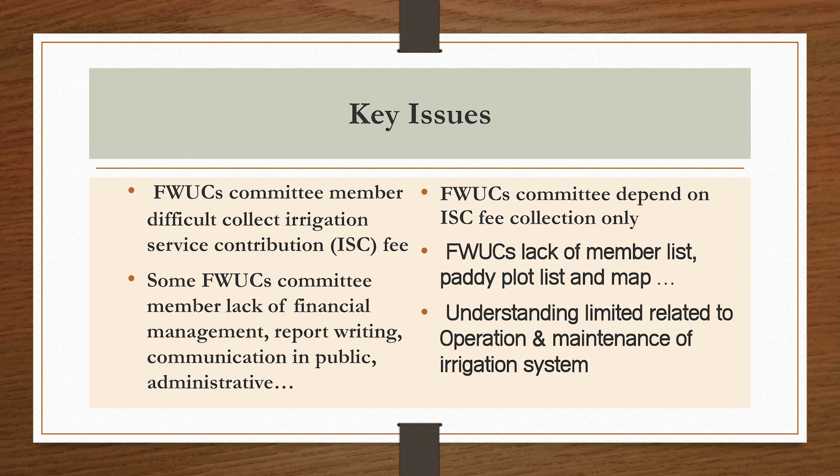Another thing is that right now the community committees depend on only one income source from their members, which is the water fee. They depend on only this one income.

If they collect the water fee from at least 70% to 80% of households, it's okay - the irrigation system or water management is okay and sustainable. But if lower than this, 30 or 40% collection from households, it becomes difficult to operate the canal or irrigation system sustainably.

So right now, to solve all these issues, my organization has developed other services and ways to gain more income, which I have already mentioned.

In summary, for the next step, we will build more capacity, facilitate and communicate with the private sector for agriculture inputs, and also make contract farming linking their products to the market. Okay, that's all, thank you.

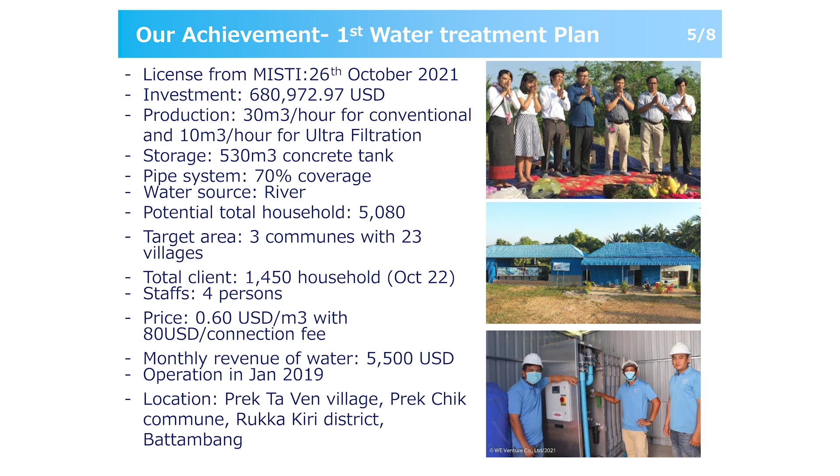This is our first water treatment plant. What I want to mention here is about the investment cost and the technology we are using. In this first water treatment plant, we use two technologies. The first one is conventional—the traditional method where we pump water from the water source, treat it with chemicals, then the water goes through a sand filter, into a storage tank, and is disinfected with chlorine. So this is the normal traditional one.

And another one we have is ultrafiltration, which is part of the membrane technology. I think even last morning they also used membrane technology. So together, that's what we provide—this is the technology that we use.

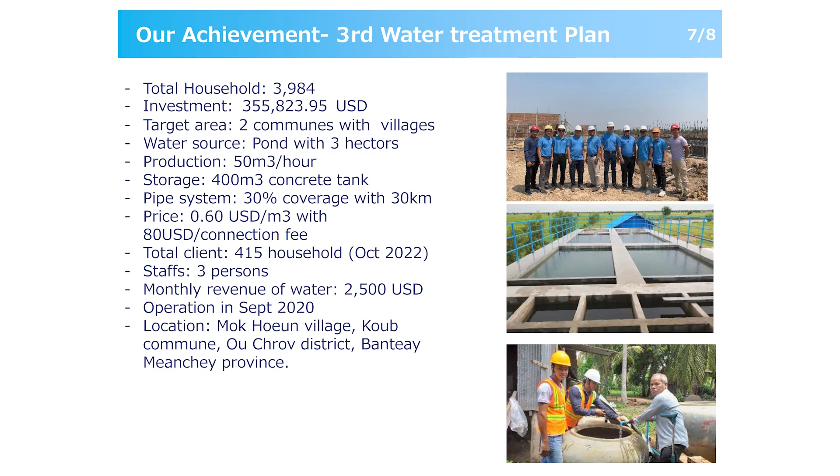The next one is similar but a bit smaller—we also use ultrafiltration. And the last one is conventional, built from concrete. So still, as I mentioned, more investment is needed on the pipe system—we still only reach around 40% of our total licensed area.

So we need to work more on this, and also look for opportunities with other investors, or work with Korean companies on spare parts, because we cannot produce most equipment in Cambodia. Most is imported from Thailand, Vietnam, and Malaysia, and Japan for generators or motors, but not so much from Korea.

So I think coming here is also an opportunity to get in touch and engage with some Korean companies. So yeah, that's all for my presentation. Thank you very much.

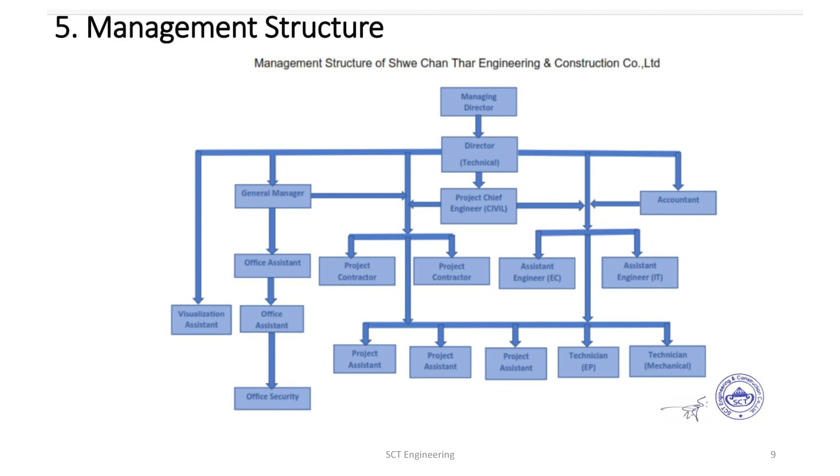So this is our management structure. In current technologies, we are applying web-based monitoring solutions and systems.

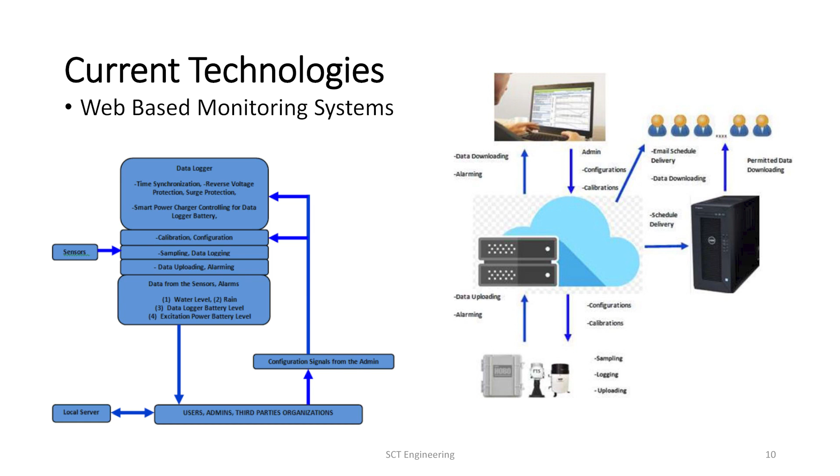Data will be monitored and collected at the sites, and then sent to the cloud server. We share the data online in real time, for mobile phones, laptops, and every internet accessible device - users can download and monitor.

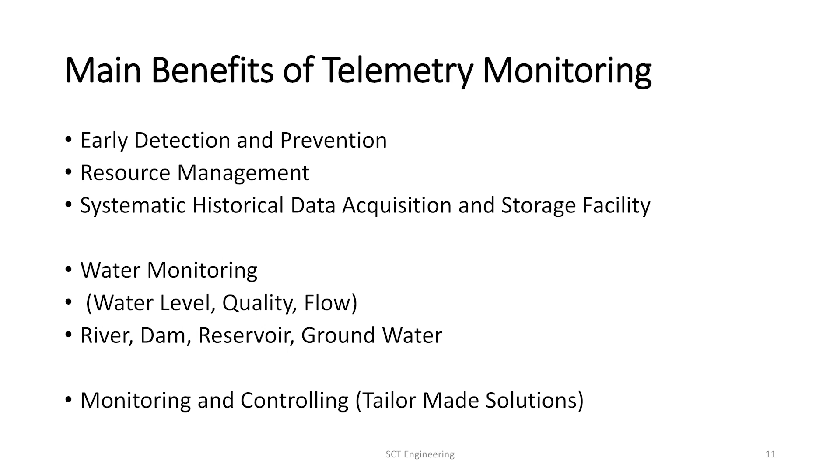So the main benefits of telemetry monitoring are early detection and prevention, resource management, and systematic historical data acquisition and storage facility, all made possible with the monitoring solutions.

For water monitoring, we monitor water level, water quality, and water flow, either in rivers, dams, reservoirs, and groundwater - not only for monitoring, but also for controlling.

This is because I'm a professional electronic engineer. I am doing all configuration and all tailor-made design by myself.

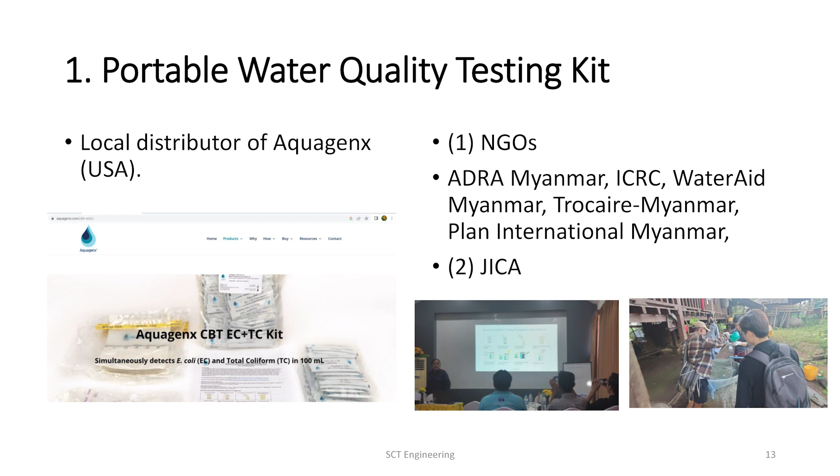We cooperate with others like JICA, GIZ, government organizations, and NGOs. Not only for assistance, but we also render services for monitoring solutions. This is our cooperation with an NGO organization for water quality monitoring, for total coliform and E. coli.

This is one part of our business - the main business of telemetry water level monitoring and early warning solutions integrated by our company, SCT Engineering. We use data loggers integrated with third-party sensors, with our principal supplier from the US.

They have their own sensors and transducers for parameters like weather parameters, water and soil moisture parameters, soil pH, soil temperature, and even leaf wetness sensors. But if our customers need more parameters to measure, we can integrate and import from third-party sensors.

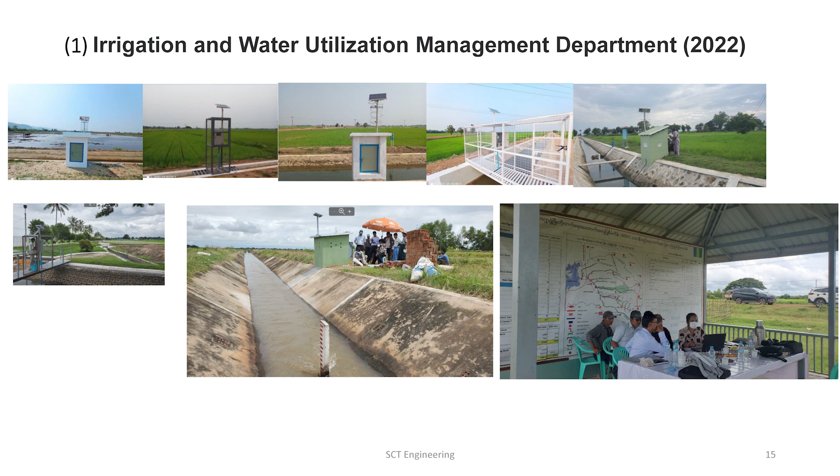So these are photos of our collaboration with the Irrigation and Water Utilization Management Department for monitoring water level of their canals. We started cooperation with them in 2021, but we actively began the installation in 2022.

At this stage, we just monitor water level only. But in the next phase, we will continue monitoring not only level but also capacity of flow. Then we will monitor and research the impact of water capacity utilization on crops, so we will be monitoring the water capacity as well as soil nature in multi-professional research.

We'll also monitor weather, climate, and temperature, and generate data and output to correlate the relationship between water utilization and effectiveness. This is under our cooperation with the Irrigation and Water Utilization Management Department's technology center.

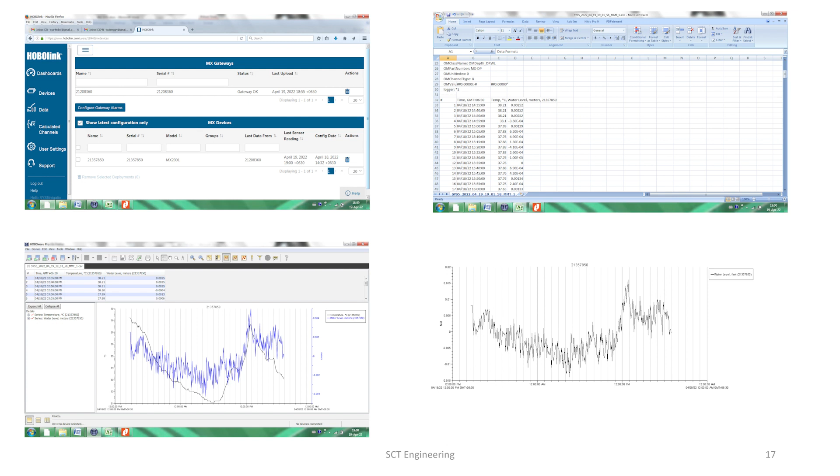So these are some views of our monitoring solutions - over there is the raw data, and this is some post-processing graph output. These are our reference photos for the projects with the Department of Meteorology and Hydrology.

These projects were installed in 2021. This was for the Mekong-Lancang project for monitoring the Mekong River early warning system. This was an international bidding, and we were invited by the Department of Meteorology and Hydrology since we did pilot projects with them since 2014 and had successful records. So they invited us to participate in this standard bidding. Finally we achieved it, and we arranged these, our own designs.

There are 10 stations altogether. 7 stations are built on bridges, but 3 stations are without bridges. So we designed for this part here with no bridge, and these for the bridge design versus the no-bridge one. Here as well, not bridge. So we have to design not only for electronic configuration but also for civil works according to the feasibility conditions of these sites.

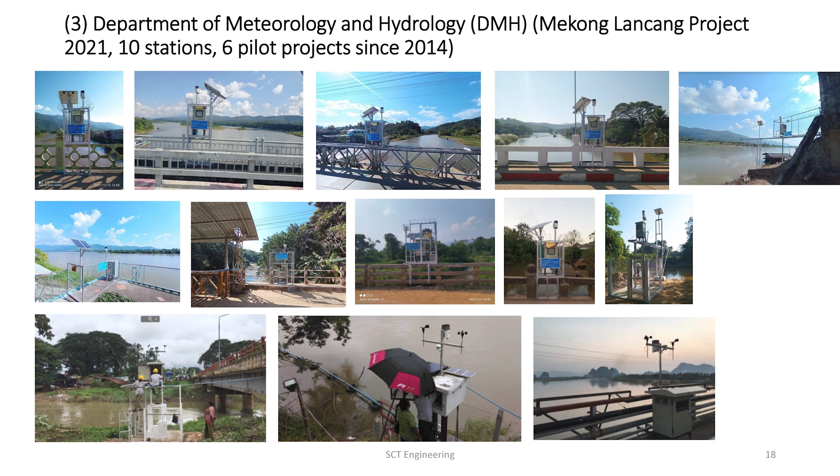Below these are the former projects since 2014, still running right now. They still only need upgrading of the data logger, because it's been almost 8 years since 2014. This is for Yangon City Development for closed channel water monitoring, and this is for water quality of construction waste products.

Key challenges I would like to highlight for telemetry monitoring: budget is very important. The government sometimes has budget, but they still need maintenance budget, and there is no maintenance budget. Also the requirement of secondary parameters for verification needs more investment. So this is one of the problems.

Also vandalism is still something we have to consider in our country. And also ambient temperature makes the expiration of the batteries too short. And also willingness to adapt advanced technology - we are seeing some resistance from the public for willingness to cooperate with advanced technology.

For future planning, yesterday's K-Water presentation was so impressive. So we are intending to cooperate with companies and organizations from Korea for visualizations of our acquired data in the near future. Thank you.

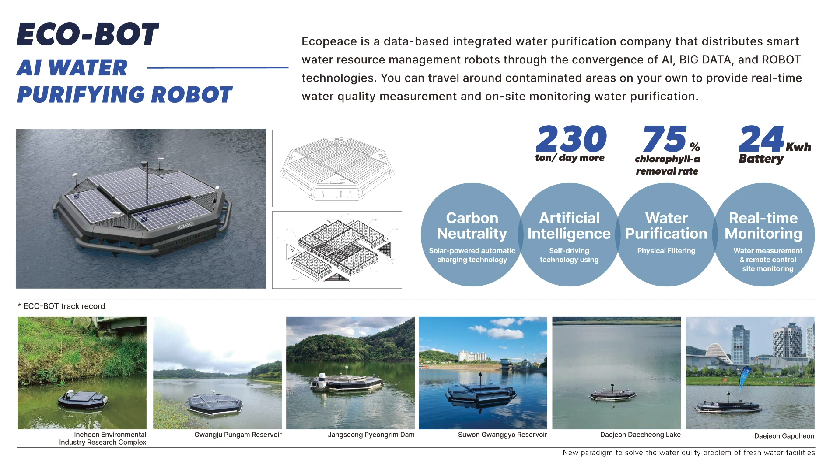EcoBot is a 100% unmanned automated water robot that provides continuous integrated water management service for freshwater facilities by converging ICT-based water quality management and 100% renewable energy utilization technologies. You can see the four keywords in the circle, and the EcoBot track record pictured here is in Korea. So EcoBot can purify the water, and also collect the water data for prediction and collection.

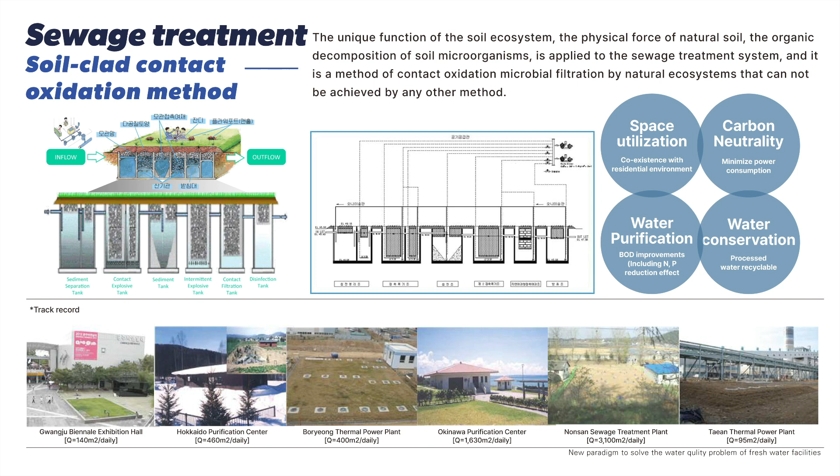That's all. If you want some information about this, just contact me. Thank you.

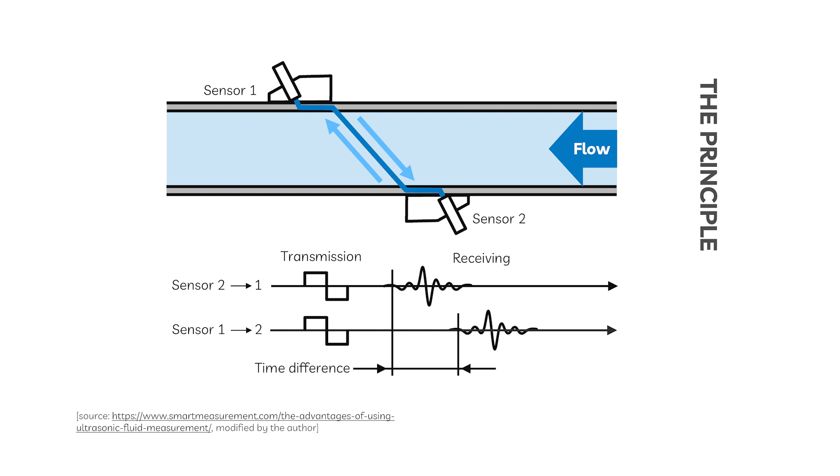It looks like very easy technology, right? But the problem is the time difference is pico to nanosecond. So we need technology to separate that pico and nanosecond difference, which is very hard. So we use digital signal processing called the cross correlation method and so on.

That's the theory. We have liquid flow meters, gas flow meters, and also a photovoltaic power supply system. We also developed defense technology using the same acoustic technology used for the flow meter. We'll talk about that later.

This is the liquid flow meter. As I told you before, we use ultrasound, a kind of sound, to measure water flow. Another technology is clamp-on. Clamp-on means, as you can see on the screen, you can just attach the sensor or transducer on the surface of the pipe to measure the water flow.

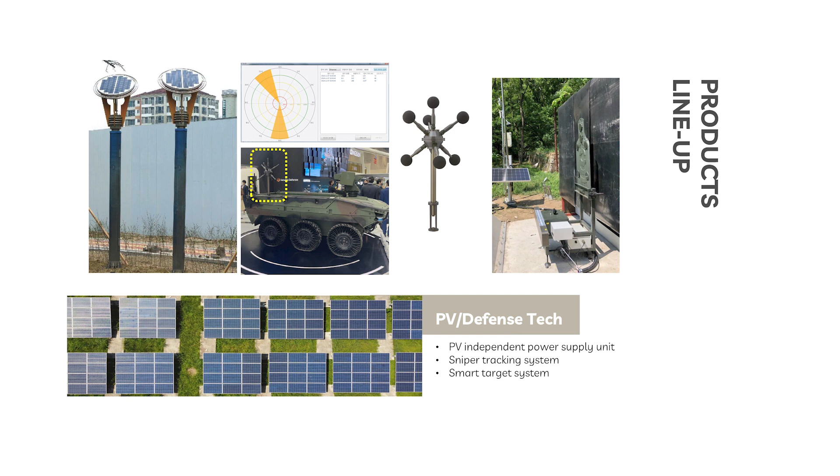We use acoustic technology to detect snipers, and also we have a smart target system. We'll talk about that later. This is the photovoltaic power supply system. As you can see, there is a rechargeable battery, so even without any sunlight, you can supply power to our flow monitoring system for a month.

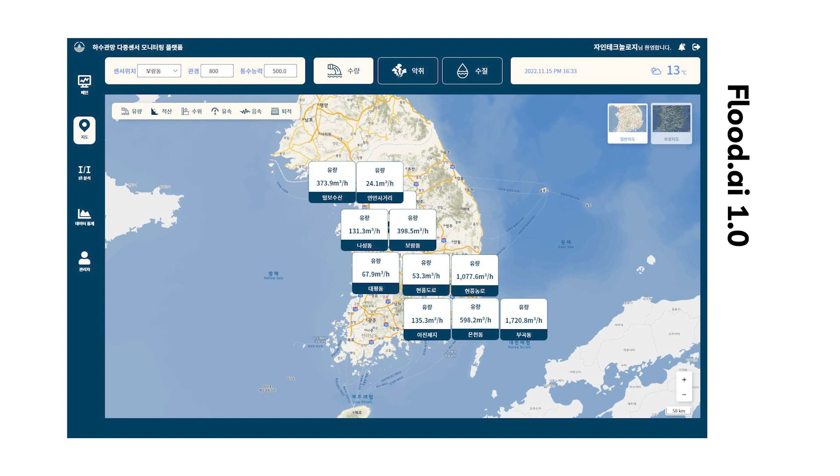And this is our data analytic platform. As you can see, there is a site with our system. If you click the site, then you can see real-time monitoring data anywhere, anytime, if you have internet access. We are trying to use the Amazon cloud server, so in the near future you can check the monitoring data anywhere in the world.

We also use data to produce useful information and value for customers. Now, defense technology: I told you we use sound to measure the velocity of flow, which is moving. If the opposite side of that technology is applied, if we hear sound, then we can locate the source of that sound, right?

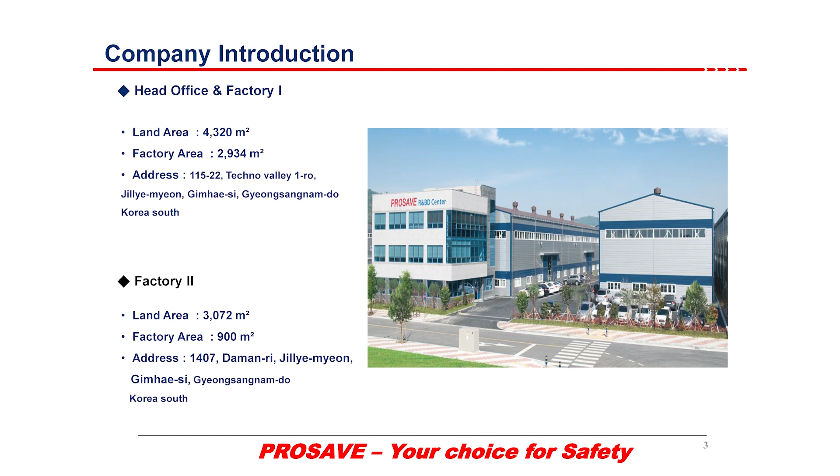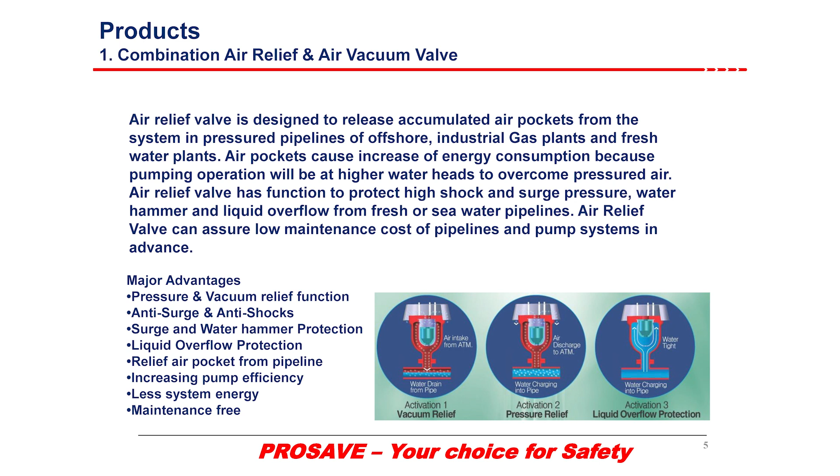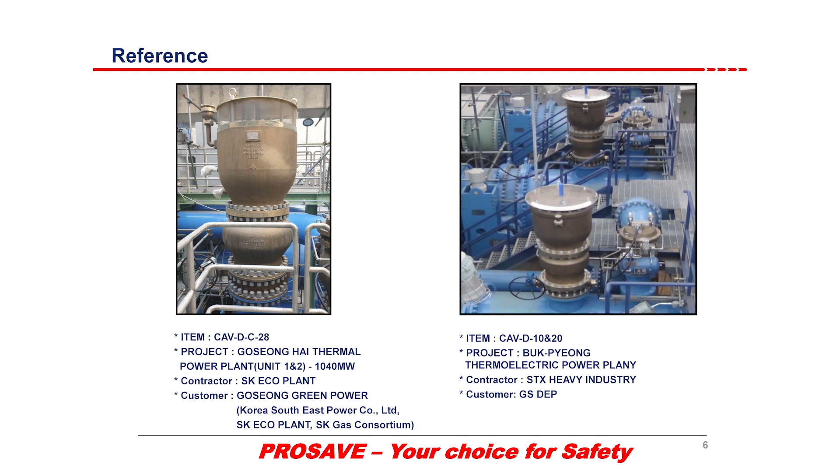Our first product is the air relief and air vacuum valve. It is designed according to AWWA standard, which means American Water Works Association International Standard. This valve releases the air accumulated in the pipeline system, reducing pump efficiency loss and saving cost. This product is installed at the water cooling system of power plants, in sizes of 28-inch and 20-inch, for desalination plants and offshore plants also.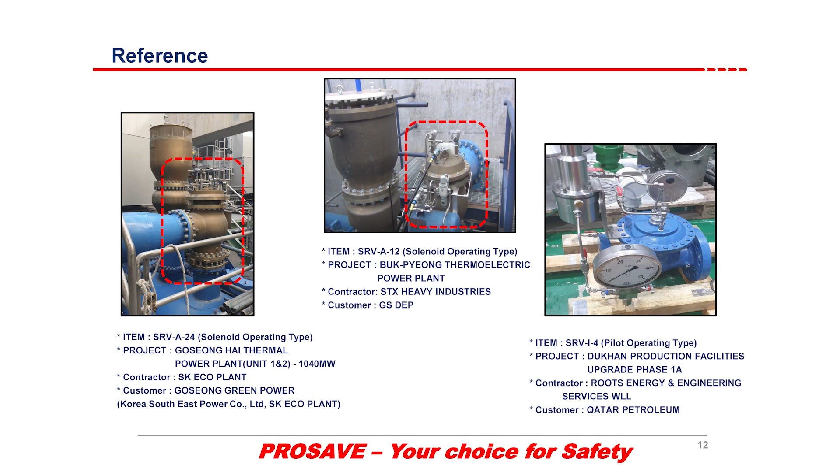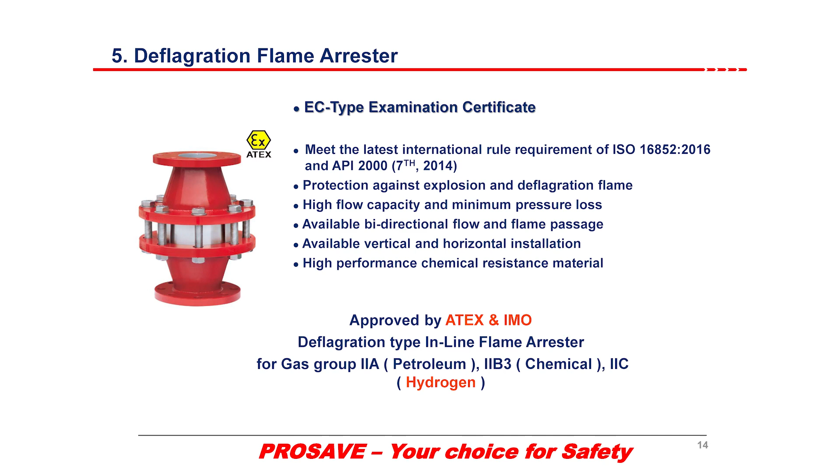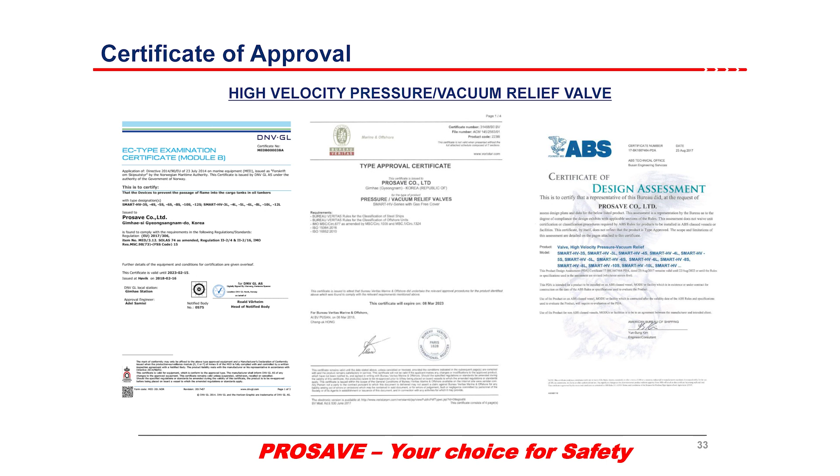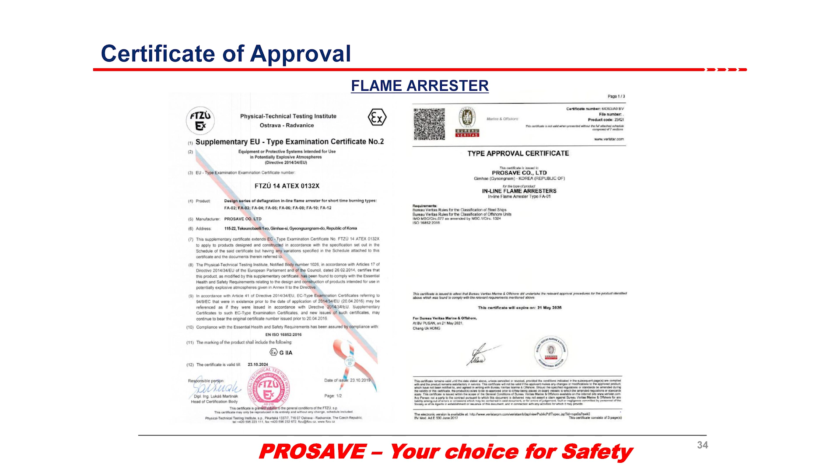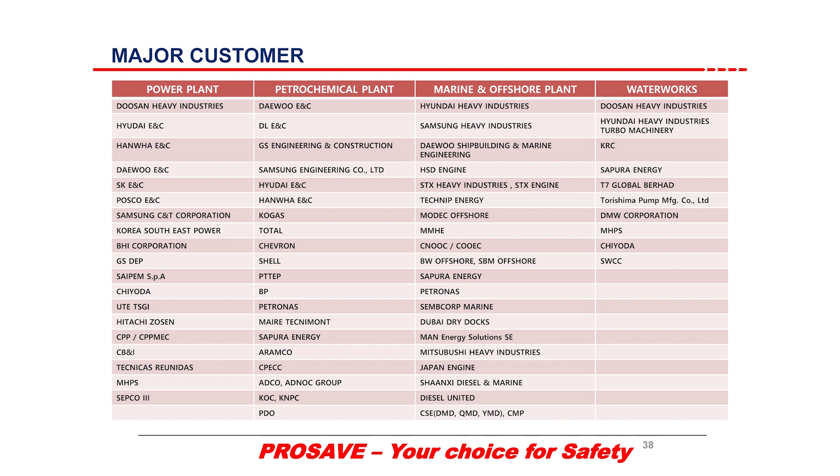The next content is the certificate status for our products. We have a high quality management system with ISO certificates and various certificates for various industries, such as ATEX, UL, CASE, etc. Last is our major customer list. In case of waterworks application, Doosan, Hyundai Turbo and Machinery, K-Water, and KRC are our main clients in Korea, and Sapura Energy, T7 Global, Torishima Pump, Mitsubishi Hitachi Power Systems, Chiyoda, SWCC are our main global clients.

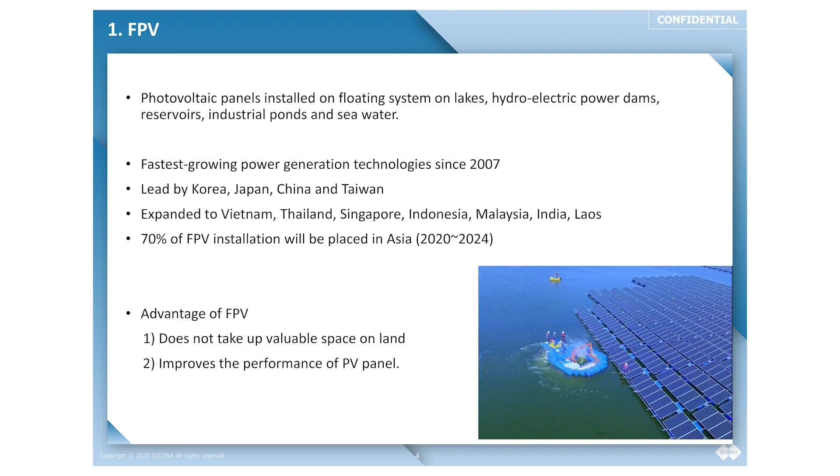There are 5 chapters, and let me start by introducing you to what FPV is, and after that, about our company. Firstly, FPV stands for floating PV, or in other words, floating solar panel power generation. It's a floating system installed on water bodies such as lakes, dams, reservoirs, industrial ponds, or sometimes in seawater. It's the fastest growing technology since 2007, and the major countries are mostly Asian countries like Korea, Japan, China, Taiwan. At the moment it is expanding to the Southeast Asian market, including the Mekong countries. The market expects that around 70% of floating PV installations will be placed in Asian countries.

I can say the advantage of floating PV is two things. One is that since it uses an unused water body, the country can use its territory more efficiently. The second is that it has better efficiency than ground-mounted solar panels, because solar panels have a suitable temperature for power generation, which is around 27 degrees. Hot weather is not always good for power generating, so if you install it on water, it gives you a cooling effect. So that is another advantage.

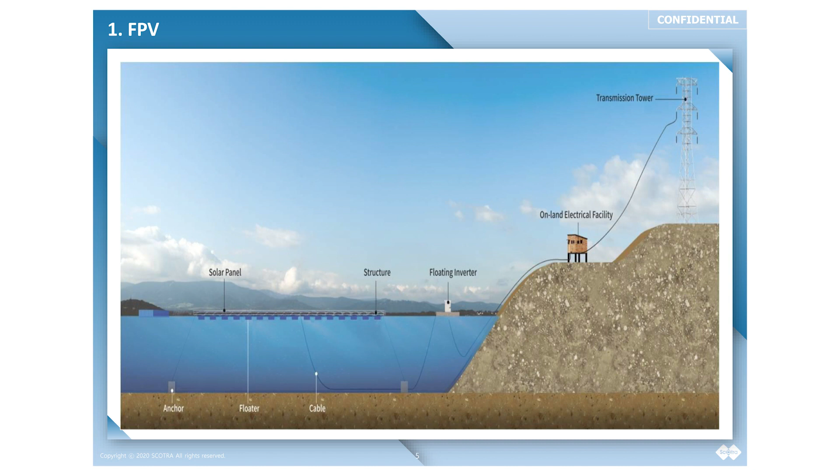Basic concept of how floating PV works. There is a floating PV platform on the water, as well as the anchoring and mooring on the bottom. It goes to the floating inverter, which transfers the DC power to AC power, and then it goes to the electrical facility and then the transmission line.

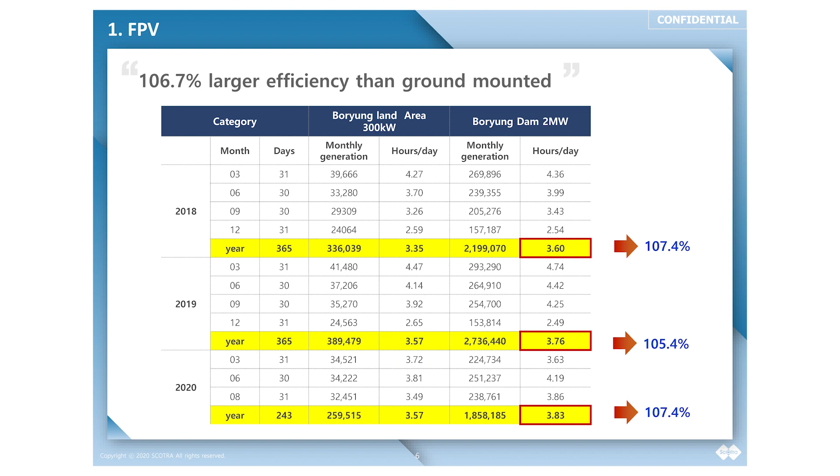This is the comparison table between ground-mounted and floating solar. We have studied for 3 consecutive years that floating solar has a better efficiency than ground-mounted, about 5 to 7%. This is not just our study, you can easily find it on Google.

Next, it's about our company, SCOTRA. We were established in 2007, and we have 92 employees. We are a company based in Korea, with one headquarters, sales office, and R&D office in Korea.

During our 17 years of history, we have achieved many kinds of patents and design registrations. The most strength of our company is that we have more than 1,800 references for anchoring and mooring, which makes us the strongest company in this field. We do know about water, we know how to control the water.

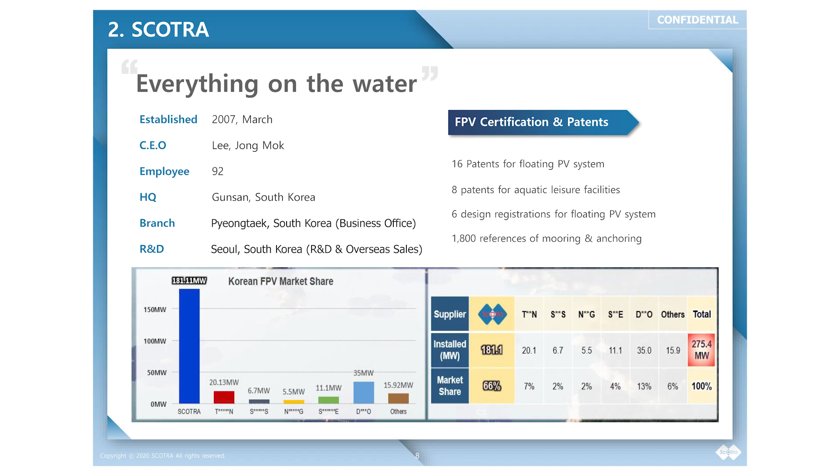The below chart shows our market share in Korea. You can see the right part, the red section. In Korea, there are totally 275 megawatts of floating solar installed. Our company, SCOTRA, has installed 181 megawatts out of 275, so we are taking around 66% market share in Korea. I can say that we are a leading company in the Korean renewable energy industry.

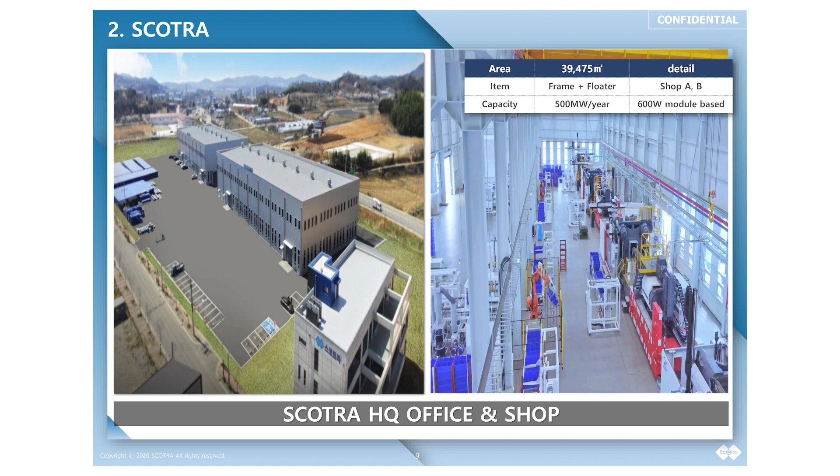This is our company layout, outside and inside. This factory is around 40,000 square meters in size, and here we manufacture around 500 megawatts per year based on using 600 watt solar modules.

Inside the factory, we have 4 injection molding machines, each with 3,000 tons capacity. It's a quite new facility, so our processes are mostly automated, so it doesn't need much labor.

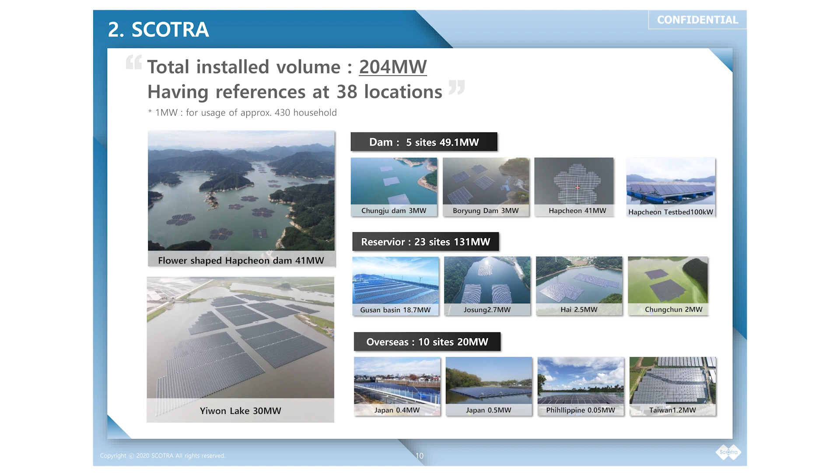Totally, we have installed 204 megawatts domestically and globally. Our project references can be divided into 3 parts: dam, reservoir, and overseas. We have done so many projects, so I cannot show you all, but I've picked some references to show you. This is one of our major project references.

This is Hapcheon Dam, a 41 megawatt flower-shaped floating PV. We cooperated with K-Water. As you can see, the floating platform is made in the shape of an apricot flower, the symbol flower of Hapcheon province. So we are capable of designing considering the client's desire. It's a very remarkable project because it not only gives power generation, but also gives a good scenic point to the public. It's a very good example for the renewable energy industry.

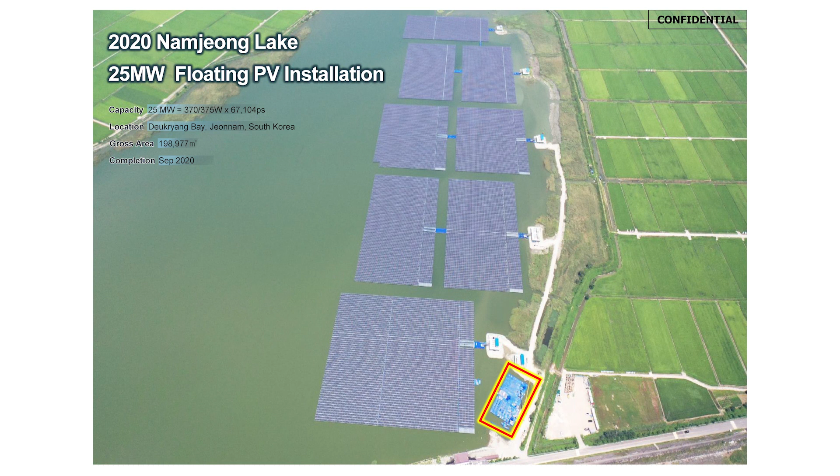Next is an industrial pond project in Korea, which we completed in 2018, located in Gunsan retarding basin. This is a reservoir project located in the southern part of Korea, a 25 megawatt floating PV we installed in 2020. And our most recent project, completed in May this year...

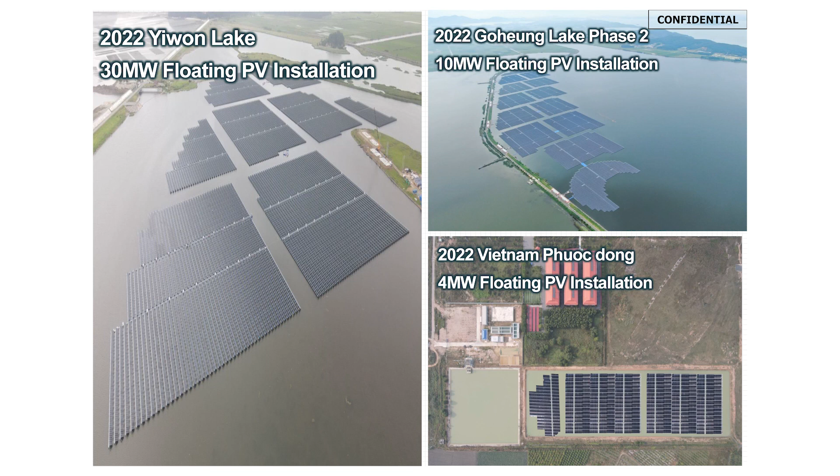Another recent project in Korean lakes is 30 megawatts and 10 megawatts. Also, at the right bottom, that is a Vietnam project, under construction, and we are targeting to complete it by the first quarter of next year. This is our first project in Mekong countries, so based on this, we would like to expand our market to global and Mekong countries as well.

Our product is simply divided into 3 parts: the floater, structure, and mooring parts. For the floaters, we have 6 compartments inside, so even if there is any damage or leakage on one side, the other 5 remaining parts will keep the buoyancy. Of course, we also have another type of floater which doesn't have a compartment.

The no-compartment type can be used for locations where there is no typhoon, no strong wind, no heavy rain. So based on the condition, we choose the suitable type of floater. And for the structure, we are using anti-corrosive material.

And it is coated with zinc, magnesium, aluminum, which shows very great performance against salted water.

And for the mooring parts, that part name is elastic spring device. It's our own patent technology. We are installing it in the middle of the mooring lines to minimize the mooring lines and to hold the floating PV platform more stably.

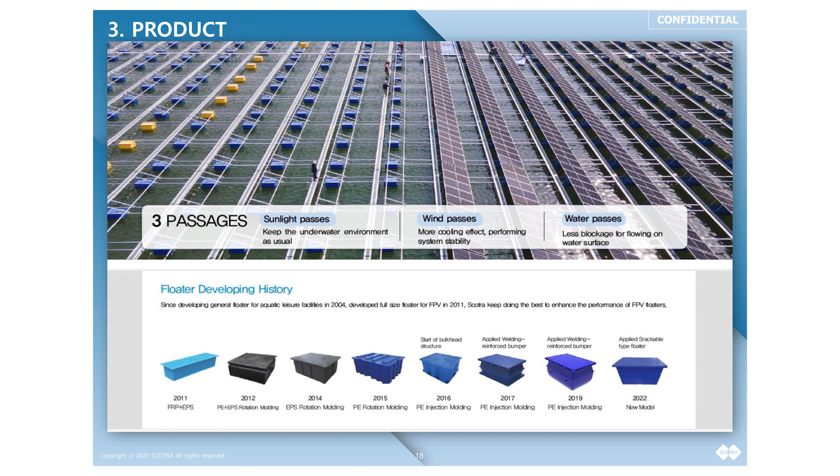Here you can see the picture at the background. Our system has lots of open spaces, which I call three passages, our most important advantage. It allows sunlight, wind, and water to pass through, so I would like to say our system is very eco-friendly. And we keep researching and developing our floater year by year to enhance our quality and competitiveness in prices.

This is the composition of our floating PV unit. It consists of a floater, frame, solar module, and at the bottom, UCS connection. It stands for unit connection spring.

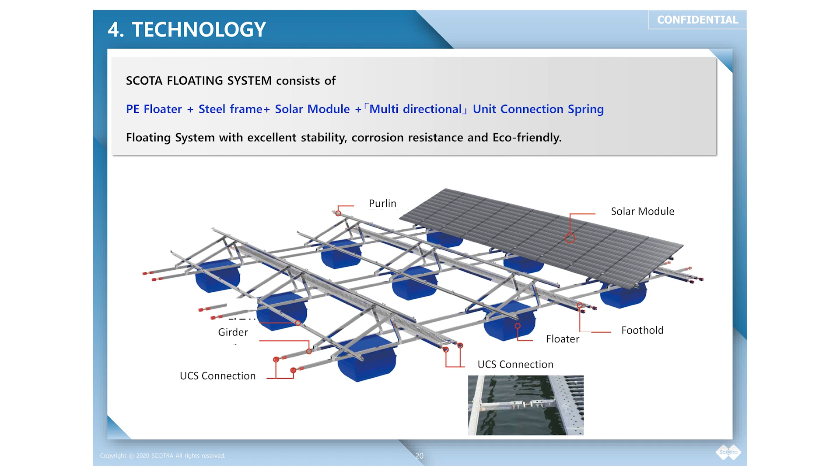This part is very important because in Korea, and maybe in your country too, we have two types of seasons: flooding and dry season. Everyone can make something float on water, but it's also important to have stability when the floating structure hits the ground in dry season, and mostly the bottom of the water body is uneven. With this UCS connection technology, the spring connection can accommodate angle changes up to 27 degrees, so our system can be placed on uneven land while keeping stability and durability. This is one of our technologies.

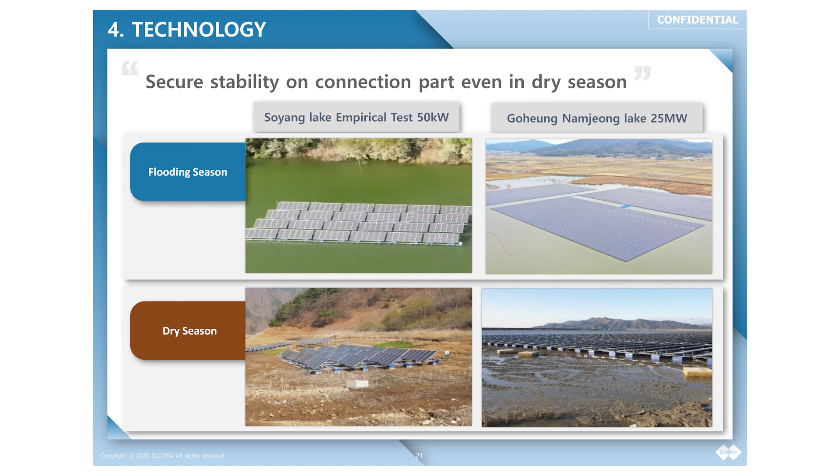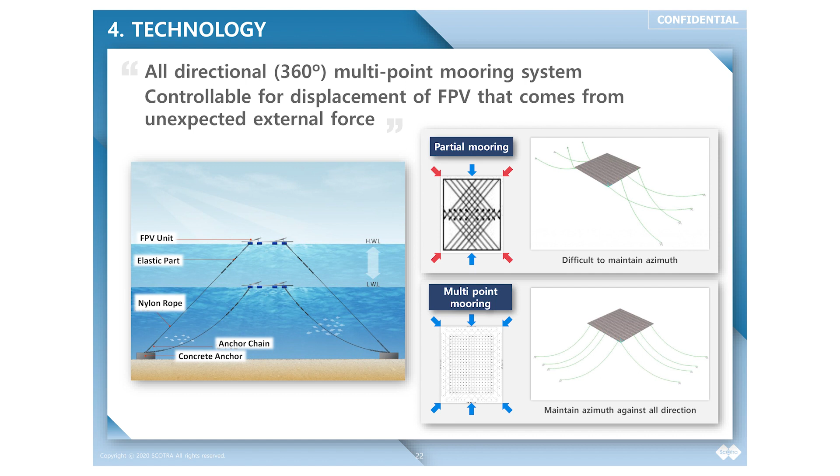This is for the mooring part. We use multi-point mooring, and for the mooring part we use the patent elastic spring technology and nylon rope. The key point of mooring is to minimize the movement of the floating PV platform to within 2 to 3 meters, and we are capable of doing that. This is our patent technology, how the elastic spring works.

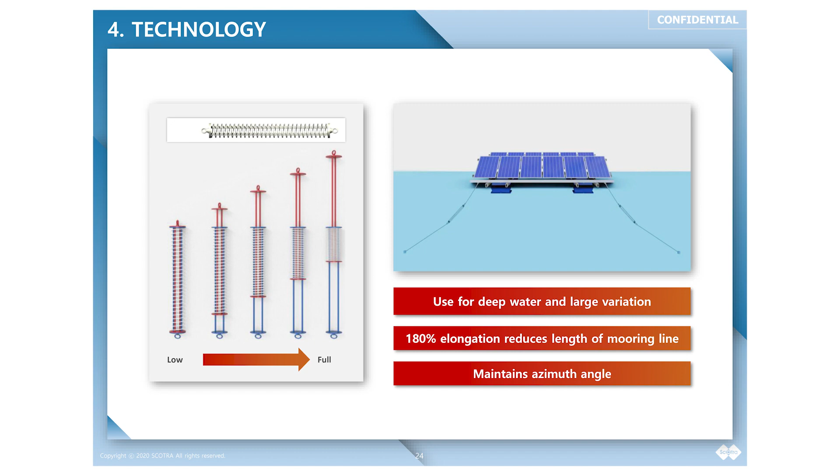When the water level goes up, the elastic spring expands, and when the water level goes down, the elastic spring shortens. This kind of technology is usually used for water depths more than 20 meters. This elastic spring has 180% elongation, and it maintains the azimuth angle as well.

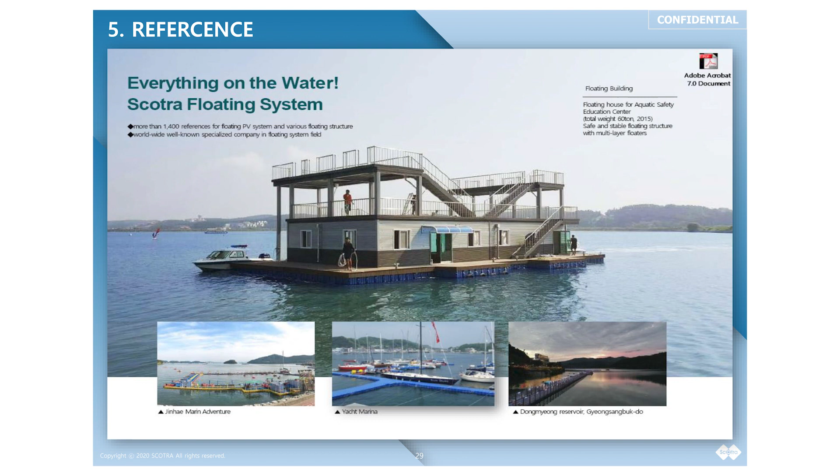Lastly, other than floating PV units, I want to show you that we also do other floating businesses, like floating buildings, floating leisure facilities, floating marinas, floating bridges, floating electrical facilities related to floating PV, floating construction barges, floating boats, and floating fish farms. For example, for the construction barge, the weight of the excavator is about 40 tons, so we can design this kind of floating barge too.

Before the end of my presentation, I would like to show you two videos that may be interesting to you.

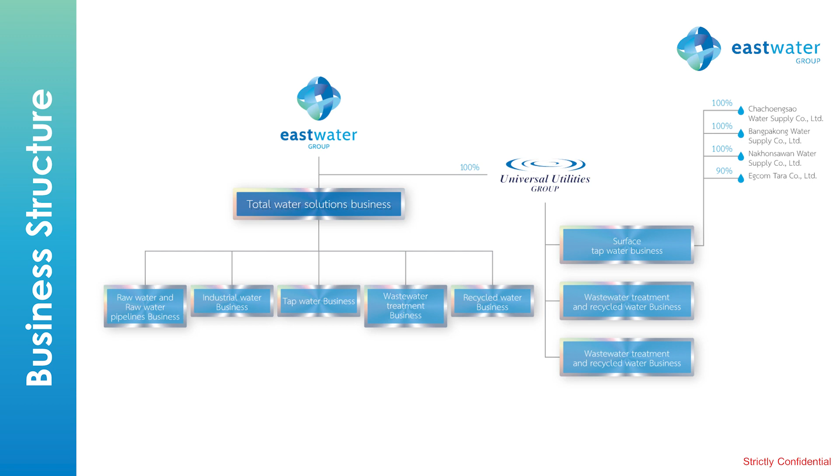Next, please. Our structure is basically: we have the main business, East Water, and our subsidiary, UU, which operates all of the concessions and all of the tap water and wastewater treatment. East Water itself basically provides industrial water, mainly to industrial estates and factories, and also for consumption for the Waterworks Authority. Next, please. So this is basically our entire total water system. We start mainly with water from reservoirs, and then we pump that.

The next is we provide water to either industrial estates or factories. That could be raw water if they have their own treatment plants, or if they don't, we treat water into industrial water up to whatever specifications is required. We also provide both raw water and treated water for tap water, depending on the contract.

Once all that water is used, the wastewater is basically treated, so we also provide that service. If required, we also provide recycling. And as I said, we also have a small side business of drinking water.

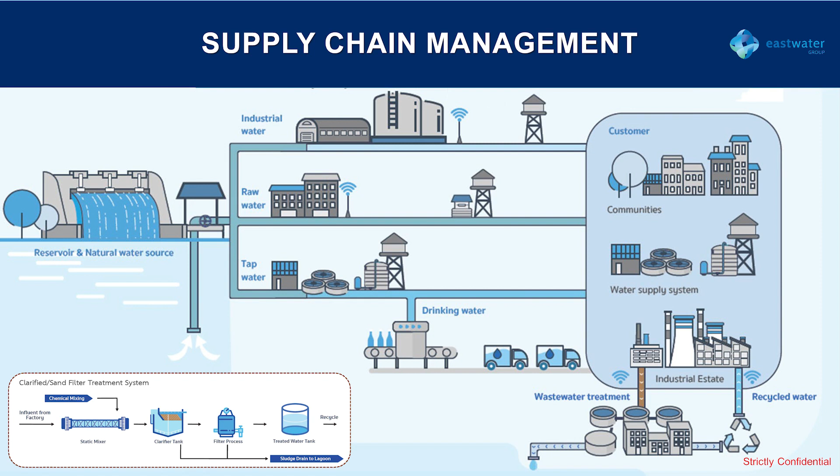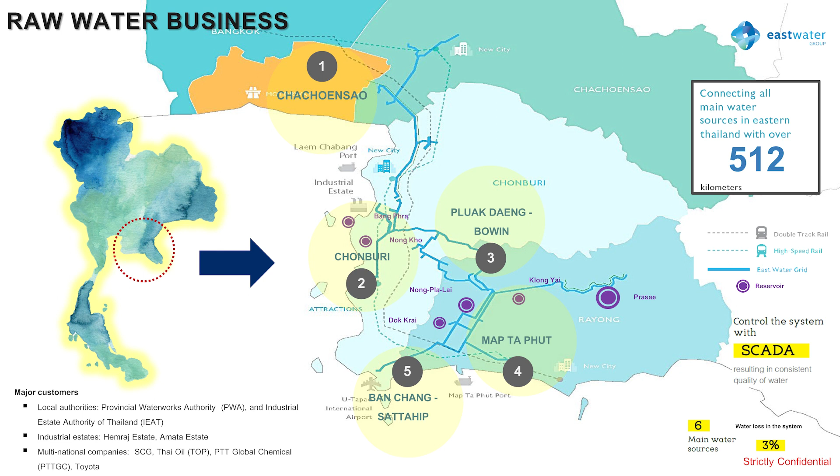Currently, our main operating area is in the eastern seaboard of Thailand, which coincidentally is the same area as the EEC, which we're hoping to develop within the next 10 years or so. We are currently operating basically 512 kilometers of main water supply pipelines. This doesn't include all the small distribution pipelines and tap water pipelines that go into some houses.

The tap water business, we basically have roughly 12 concessions currently. Some are held by Eastwater, some are held by our subsidiary UU, but all of them are operated by UU. The total production is roughly 350,000 cubic meters per day just for tap water, and another roughly 500,000 or so for industrial water.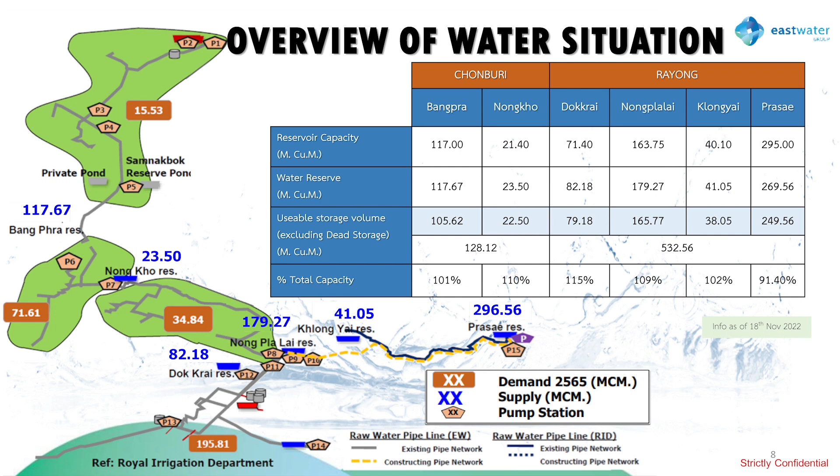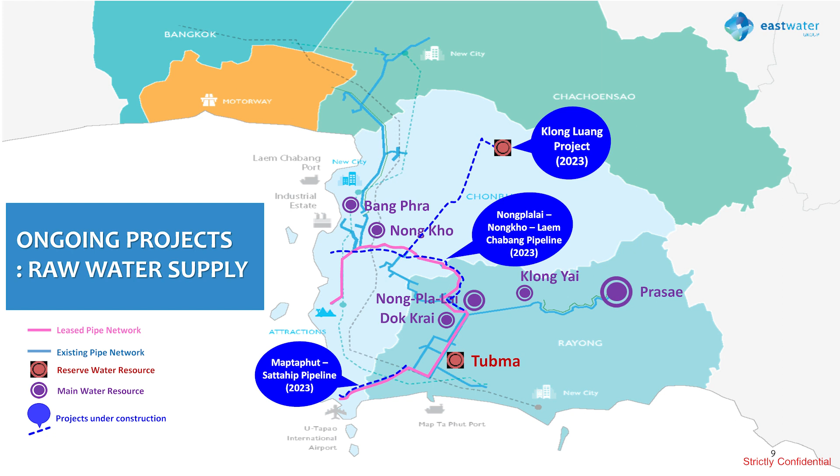This is just to show our current water supply projects. The top one is the Klong Luang, a water supply system from Klong Luang Reservoir to supply EEC. We also have new parallel pipelines. The second one, the Nongplalai, Nongkho, Laem Chabang, parallels our existing pipeline because we are currently at maximum capacity already, so we need to expand. Same as the Maptaphut Sattahip. So we are expanding to support the growing demands of the EEC.

As I said, we provide total water solutions. Basically, three types of contracts: BOT, BOO, and just O&M, depending on whatever the client requires.

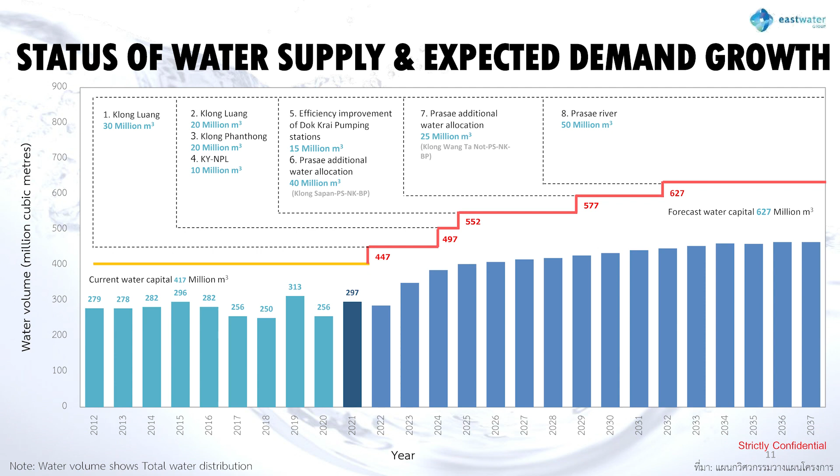This is the plan for expanding the water supply over the next roughly 15 years or so. As you can see, we are expecting a pretty large jump from the EEC in basically the year after next. And then we have various projects to expand the water supply for the eastern seaboard. And that's about it. Thank you.

The capacity of this plant today is 300,000 cubic meters per day, expandable to 1.2 million cubic meters per day in the future. Lastly, we have the project called Cua Lo, a water treatment plant also in Nghệ An province. So that would be the projects in Vietnam.

Next slide, please. Basically, we are not the company that owns the technology or has the product on our own. We are the investor. We invest in utility projects and sell the product to our clients. So the service type we have will be related to the investment scheme: BOO, BOT, or O&M. Our strength is the O&M.

WHA UP, formerly known as Hemaraj Industrial Development, has been in this business for more than 30 years. We have people who know how to operate the water system, and our product covers the full spectrum of water utilities.